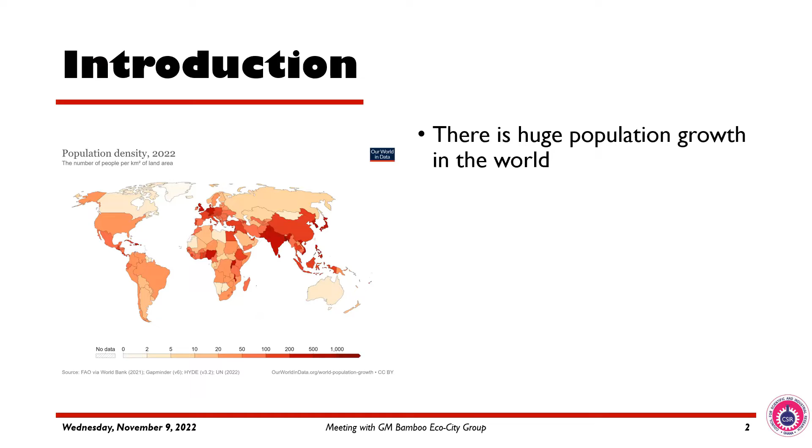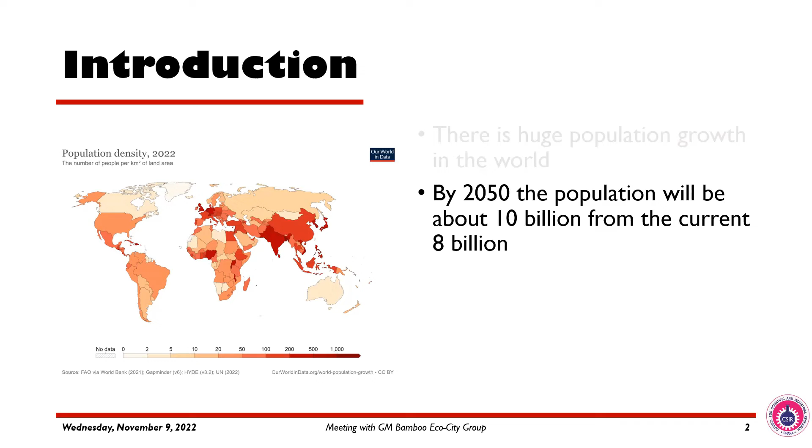So with the introduction, I'm showing the world map, and the reason is to relate it to population. There's a huge population growth around the world. Now we know that our population is about 8 billion. It has been predicted that by the year 2050, the world population will be about 10 billion, up from the current 8 billion.

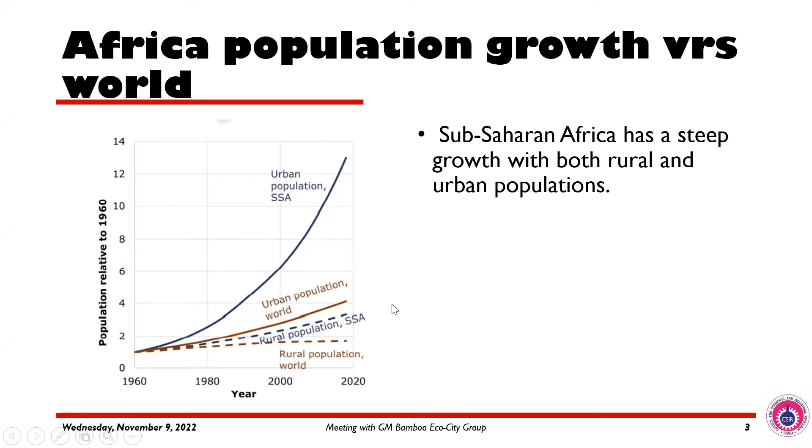The urban population in the world is also growing. But if you look at the rural population in the world, it is not growing, it is steady. However, the rural population in sub-Saharan Africa is also growing. So we can see a steep growth in both rural and urban population in sub-Saharan Africa.

Because of that, the demand for housing and other infrastructure in sub-Saharan Africa is very huge. It's not as huge in the developed countries because they've built almost everything already. In developed countries, when you go there, you don't see a lot of infrastructure development — their forefathers did very well to build everything for them. But in sub-Saharan Africa, our population explosion calls for a huge demand for housing and infrastructure.

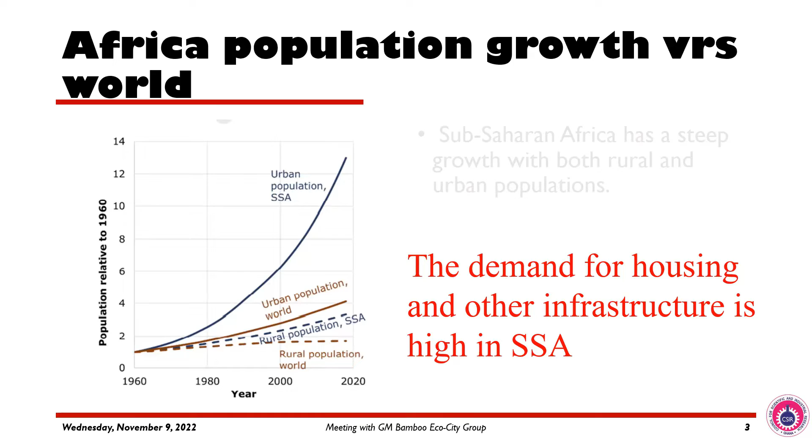So let's look at the Ghanaian scenario. We have about 16 regions, and I picked this data from the Ghana Statistical Service, between 2012 and 2022. In 2012, our population was about 26 million, and every Ghanaian knows that when they ended the census, our population in 2022 was about 33 million. So we know that by 2030, 2040, or 2050, we are going to have a high increase in our population growth.

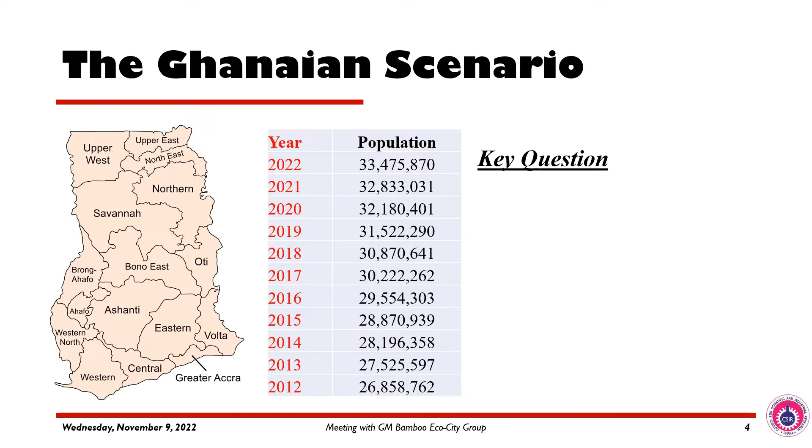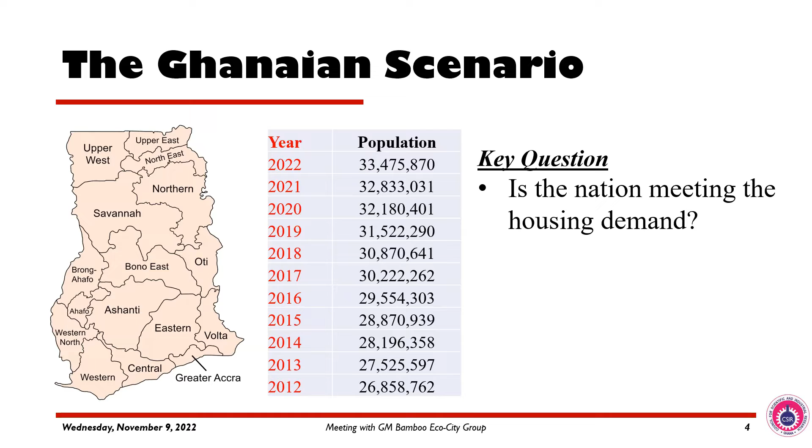So the problem can be viewed from different angles. As a cement scientist, now let me put myself in that perspective — how do I view the problem from my viewpoint? Let me give an emphasis before that.

We all know that in Ghana, almost every construction we do is in cement-based material. About 80 to 85% of our construction is from cement.

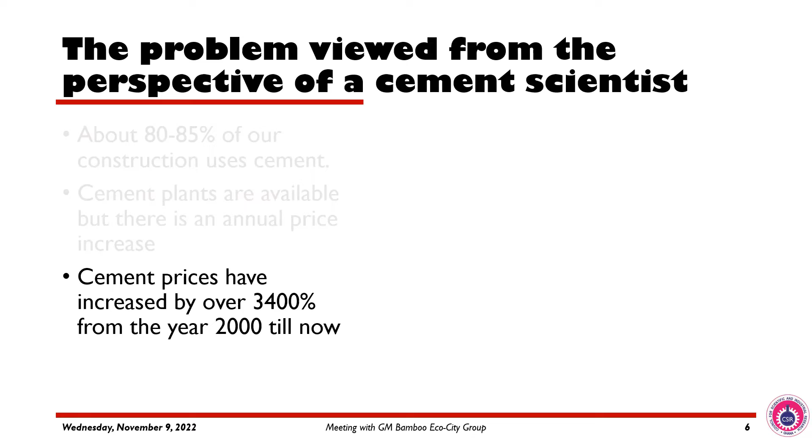Between the year 2000 till now, cement prices have increased by 3,400%. This is really huge. To back it up with data, I've been collecting my cement price data between 2000 and 2022, before I joined BRRI, every year I record it. So that has been the trend, and it keeps on increasing.

Because of this, it has really created problems with housing delivery. Cement-based materials are very expensive. For example, per meter cube of concrete, I remember two years ago it was about 400 Ghana cedis. Yesterday, I picked data from a concrete manufacturing plant, and for C30 concrete, you can buy it around 1,300 or 1,400. So you can imagine.

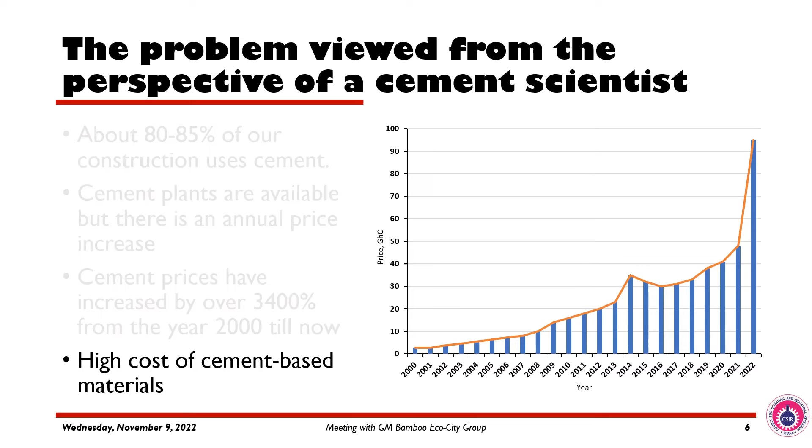The reason for these prices, I think if we care to know, is that we depend so much on imports. But I think as the presentation goes on, we will actually explore that.

So do we have feasible solutions? Yes. If we are having problems with cement price increases, then the best approach is to ask what we use to produce cement. It is clinker and gypsum. So why don't we produce it locally? That is a long-term solution. But the question is, is it possible for us to produce clinker and gypsum locally? We will answer that.

So let me say that we can't produce clinker and gypsum. Our limestone in Ghana is not of a high enough grade quality to produce the high quality clinker that you need. But of course, we have one plant in Ghana, by Diamond in Buipe, the Savasem, producing clinker. I met them recently in my office, and they shared with me the struggles they are going through to produce the clinker. I think next week I'll be at the cement plant for us to share some of these things and see the possible solutions we can provide.

So if we can't produce clinker, what about reducing the clinker factor in cement? Cement has been categorized into CEM I and CEM II. In Ghana, you don't have much CEM I, but CEM II is very common. CEM II uses about 85% clinker, then adds a bit of filler, which is limestone, and gypsum. Can we further reduce the clinker factor in cement to, let's say, 50% or 60%, so that at least we can cut down clinker importation in the country? Because that is the bane of our problem.

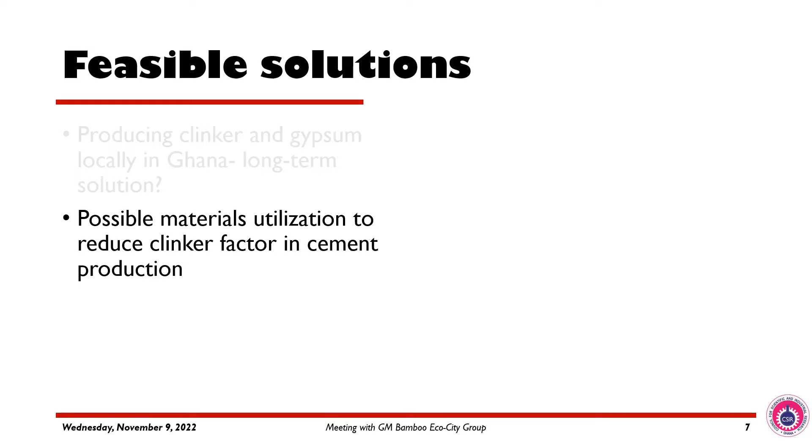So these are some of the possible materials we can use to reduce clinker. We have pozzolans in the form of calcined clays, fly ash, and silica fume. We also have fillers. I've mentioned CEM II, which is produced in Ghana using a bit of filler, containing about 85% clinker and about 15% filler—chalk, limestone, talc, oyster shells, clam shells. We can also use latent hydraulic materials, like slags, to produce that.

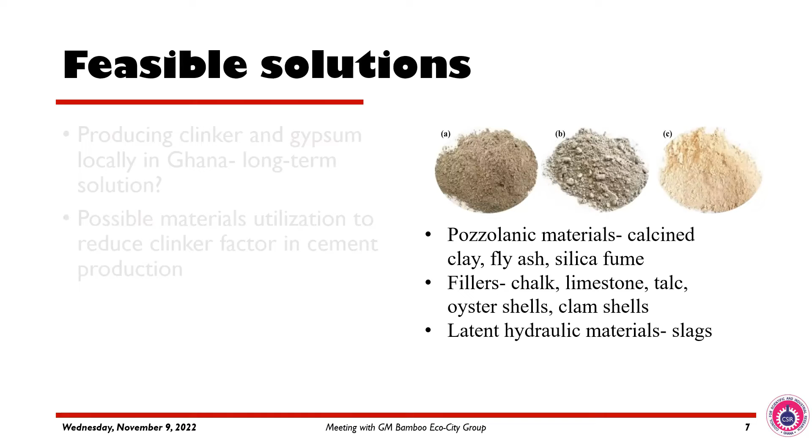So what we can also do is use a mix of non-cementitious materials and cementing materials for construction. If we can use a mixture of non-cementing and cementing materials for construction, then it means we can actually do something about the cost.

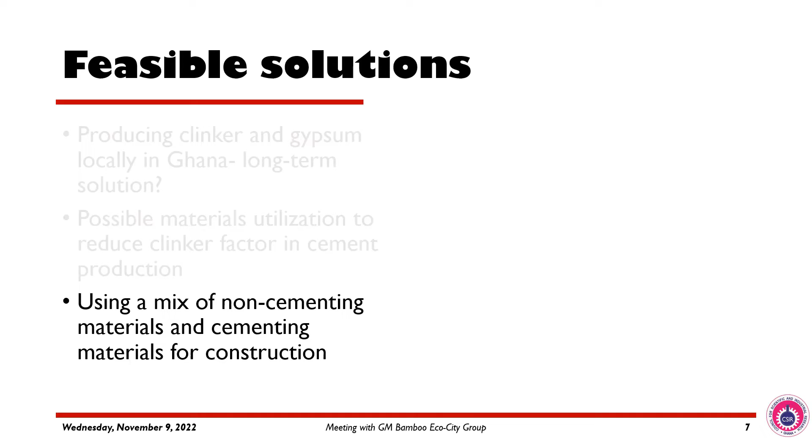Now, I picked this work. This is a Ghanaian lady working on rammed earth construction. She used about 5% cement with laterite earth, rammed it with ramming machines, and used it to produce houses. I think it's a very innovative way to build our houses. What I'm saying is we can get a mix of cementing materials—for example, columns, pillars, and beams made of concrete—and non-cementing materials like rammed earth, which uses very little cement, to reduce the cement cost.

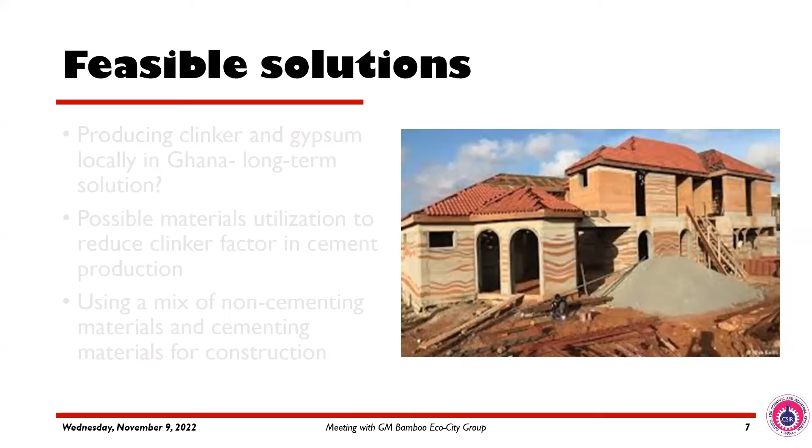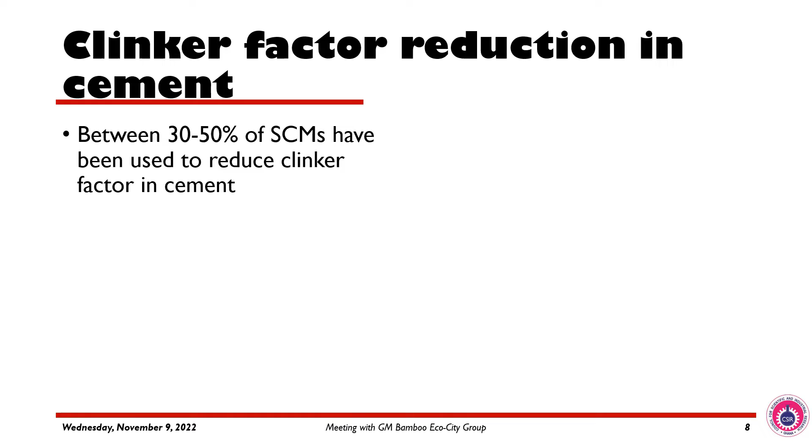So we want to look at clinker factor reduction in cement. Practically, we are using between 30 and 50% of supplementary cementitious materials to reduce clinker factor. That has been what has been done in the world, and we have advanced that.

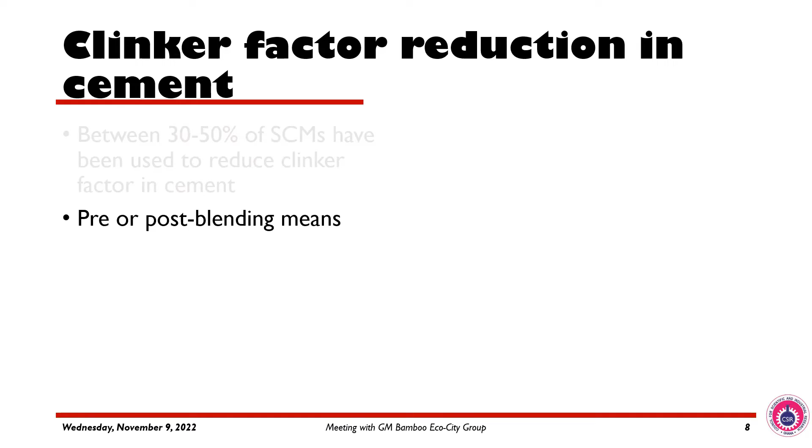When we do that, we are either pre-blending or post-blending the materials. You can pick a material and use it at a cement producing company, they have silos for the supplementary cementitious materials and blend them together. You can also do post-blending, which is when you are making your mortar or concrete on site, and you come along with, say, a clay pozzolana, blend it on site and use it for construction.

All these things have shown that, yes, we can improve the strength properties, which involve compression, flexural, modulus of elasticity, dynamic modulus, and what have you. And we also improve the durability of the material, in the sense of transport properties like resistance to aggressive ions and carbonation. All these things are improved when we use these materials to reduce clinker factor.

I did this work last year, where I replaced cement with between 10 and 50% of calcined clays, and cured it from 3 days to 90 days to look at the performance. What I did was to look at the common concrete grades we use in Ghana. When you go to many sites, it's between C25 and C30, so I used C30 to design my concrete.

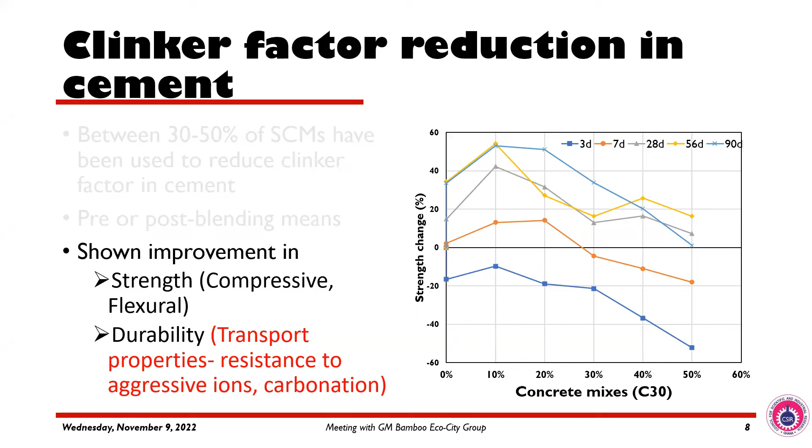I did a little bit of durability tests. One of the common durability tests is to look at chloride ingress. Mostly durability has got to do with the pores within the material. If you can look at how the pores are arranged and how easily some ions can flow through the material, then you can understand the durability. So I used the rapid chloride permeability test.

I prepared this concrete, and of course, you realize that almost all the materials containing clay pozzolana had a lower ingress of chloride compared to the control. But the point is that we want to reduce costs, so we are interested in higher volumes of replacement. 10, 20 is okay, but let me look at 30, 40, and 50, because the higher I replace, the more savings I make. And 30, 40, 50 were similar. It gave me an idea to look at all these replacement levels. But it doesn't end there, we have to do so much work on it to actually convince ourselves these are very viable replacements we can do.

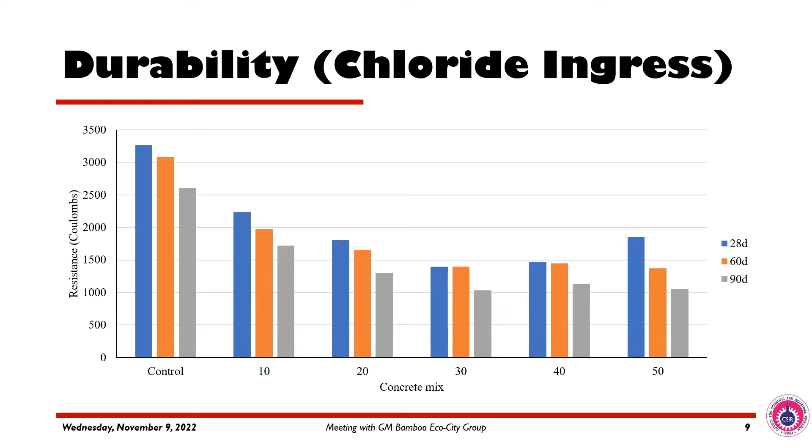Let's look at economic benefits. Contractors are always interested in these things. Because I did some work on concrete, I prepared some economic benefits, specifically more of a financial economic benefit. In a concrete per meter cube, this is the composition per kilogram - with the cement I'm using 406, 208, and then the rest are the various compositions. We looked at the costs per meter cube and the cost of producing a C30 concrete, and I got 896 Ghana cedis.

I did 30% clinker reduction, or cement reduction, replacing it with clay pozzolana, and reduced the cost by 5%, so I had 853. At 40%, I reduced the cost by 7%. At 50%, I reduced the cost by 10%. That is very important - one of the most important things I want you to note is this one.

So just note the cement cost reduction. With the control, the cement was 771 Ghana cedis. When I reduced it by 30%, I was getting 547. So in a nutshell, what I want to drive home is that you are reducing cement costs by reducing clinker factor or replacing it with appropriate cementitious material, and you are getting a reduction between 29% and 49%. So that is a key thing I want to drum home. Two things you can see from this table: you are reducing the overall cost of concrete, and you are also reducing the overall cost of cement.

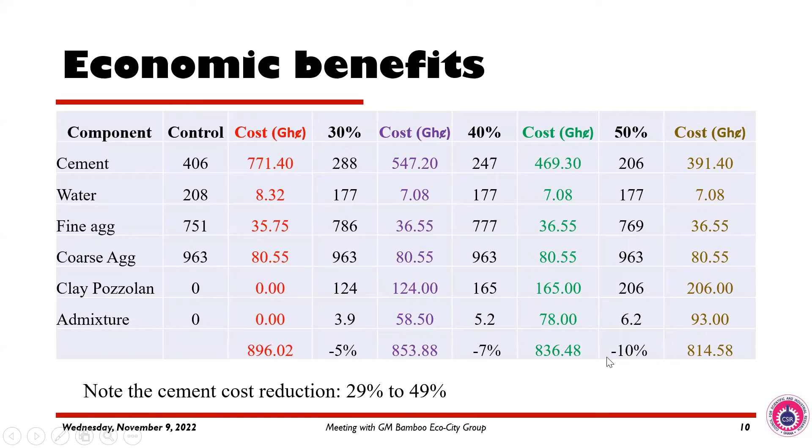Sometimes I always work with chemical admixtures in the form of superplasticizing agents. They are high range water reducers. In Ghana, people don't use that much, but I always encourage people. In my lab, I do a lot of concrete mix designs for clients. So when they come, I always do the design using chemical admixtures. Some people don't like going with the admixture, they say okay let me do it without. But it's always safe for you to use chemical admixture because you are able to control the water to cement ratio, the water content in your concrete mix. It is very safe. So you can imagine that if I'm not using chemical admixtures, you can save more than the 5% and the 10% that I'm talking about. So this is the economic benefit of using this kind of materials.

So what are some of the advances that we've made around the world? It is not only a Ghanaian issue, it's around the world.

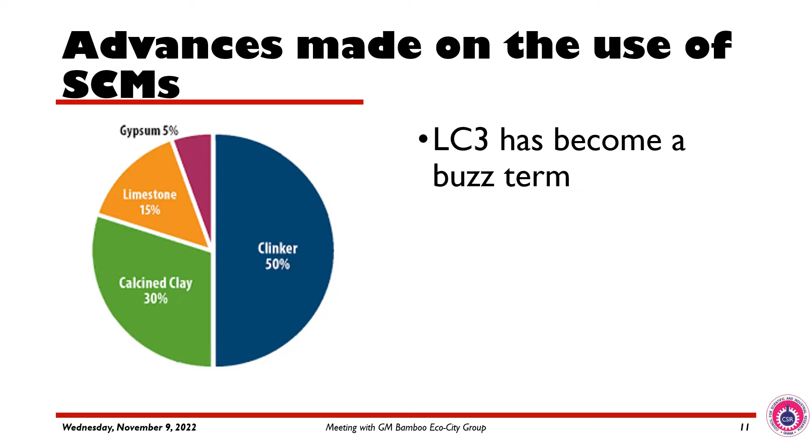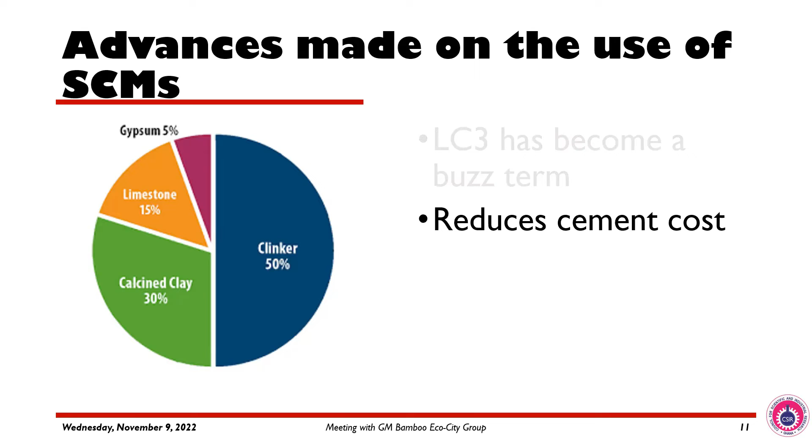Okay, so now we're talking about LC3 cement. What is LC3? LC3 is basically reducing clinker factor to 50% and adding calcined clays and limestone together with 5% gypsum. So why is it so important? It's a buzz term in the world. As I initially mentioned, there's a professor at EPFL, Professor Karen Scrivener, who has been working so much on LC3 cement and pushing it. Now she chairs the Energy Committee, she's part of the Energy Committee on the IPCC. And as I'm talking now, she's also at COP, the COP meeting in Egypt. So we found that when you reduce clinker factor by 50% and replace it with these cheap materials like clay, pozzolana, and limestone, you invariably reduce the cement costs. And then you also reduce the carbon footprint of concrete. In the next slides, I'm going to share with you the carbon footprint of concrete.

So let's look at how the carbon footprint performs, and that is an environmental issue. Every plant that produces cement generates approximately 1 ton of carbon dioxide. The point is that most sub-Saharan African countries are net consumers of cement. We don't have so much of plants that are producing cement like the developed countries, like China, India, and some parts of the Asian countries. They produce so much cement. So in sub-Saharan Africa, we don't have that. We also don't have other companies that generate so much carbon dioxide. So we are net consumers of cement.

This graph is showing the consumption or the generation of carbon dioxide. Now, by the IPCC, the threshold is 2.7 kilotons. But when you look at this graph, you see that sub-Saharan Africa is way down. We don't generate so much carbon dioxide in the atmosphere. So who cares? If you're not generating so much carbon dioxide, why do we have to bother ourselves with what the Europeans and the Americans are saying, that everybody should think about carbon dioxide emissions and let's make the world safe? After all, when they are having energy problems, they try to go back to the use of coal. But that's not the issue. The issue is that both the producers and the consumers contribute to carbon footprint.

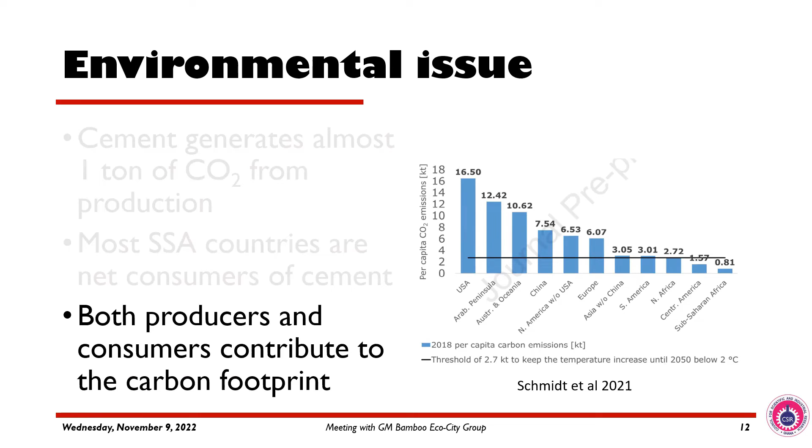In my next slide, let me walk you through carbon footprint in the world. So what is happening is that I think we generate about 60 billion tons of carbon dioxide in the world. The cement plants are contributing between 8 to 10% of this carbon footprint. Now, the point is that as the carbon dioxide comes into the atmosphere, it actually prevents the heat generated by the sun from escaping the atmosphere. So when it's not escaping, it means that the heat is remaining in the atmosphere, and some say it cooks the earth. So whilst it cooks the earth, we suffer. Now, the world has seen that if we don't take care, and now we are around 410 parts per million, and if we don't take care and we go to about 550 parts per million, it is going to generate a serious catastrophe for the world.

You and me, we can't survive on this earth. So we are doing our very possible best to reduce our carbon footprint so that we don't trigger it. That is why it is important for every country to do its possible best to minimize carbon dioxide footprint.

Well, the effect of these things is the cause of rising sea level. So now, as the earth is cooking up, the glaciers in the Arctics and the Russians, the cold parts of the world, are melting up. And as it melts, it increases the volume in the sea, and that triggers flooding and many things happening around the globe.

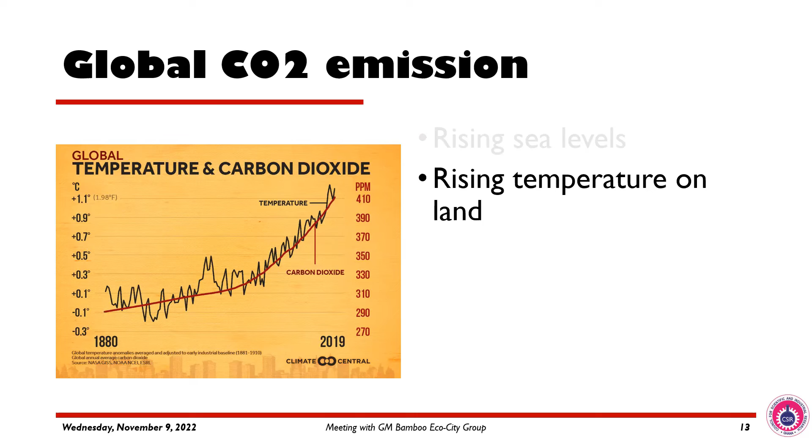It is also cooking the earth, cooking the land, rising the temperature on earth, and we are experiencing global warming. You go to other countries and see that the weather pattern has changed, and everybody listening here will accept that, yes, the world is becoming warmer and warmer.

And we are also having increasing temperature on the sea. So the earth is warming up, the sea is warming up. Now, if you look at the science behind the increasing temperature of the sea, that is what generates all the hurricanes happening in some parts of the world. It brings currents, and then we hear of tsunamis, we hear of Hurricane Katrina, Hurricane Charles, whatever they want to name them.

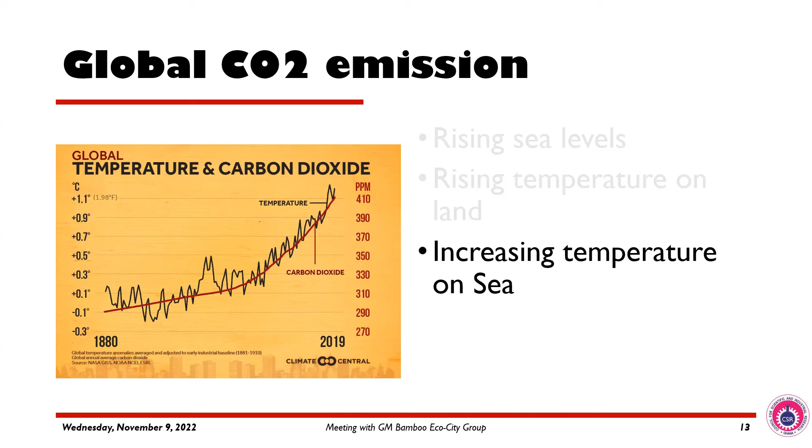So that is it. Global warming is not an interesting thing for the world. The science has proven it, and there's so much data to back that yes, global warming is occurring, and we need to minimize carbon dioxide generation in every country.

Well, so if we have to minimize it, what is the cement plants doing? What is the concrete industry doing? As I've already mentioned, the cement and concrete industry is contributing between 8 to 10% of global carbon dioxide emission. This is work that was done by the American concrete industry some years back. They looked at replacing cement with supplementary materials.

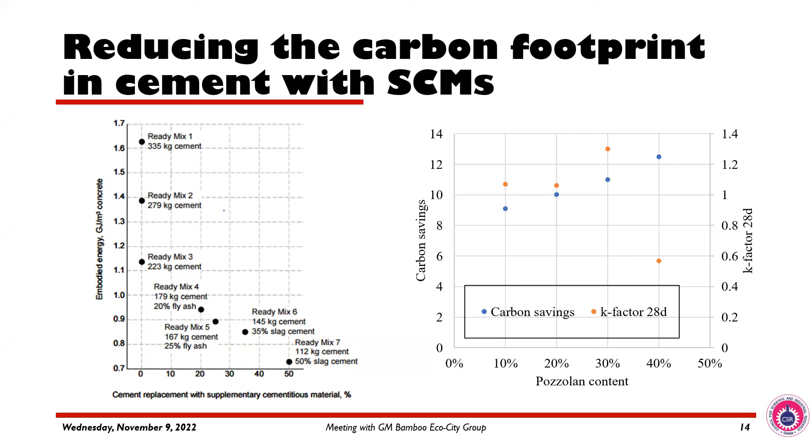So after doing this efficiency factor, I also did some work on carbon emission and environmental impact. This is also very key. We have environmental impact and total carbon emission. In this area of cement science and concrete, you have to be mindful of these two things. Environmental impact is a ratio between the total carbon of the material you are generating against the strength you are achieving at the required time, and in the standard, the required time is 28 days.

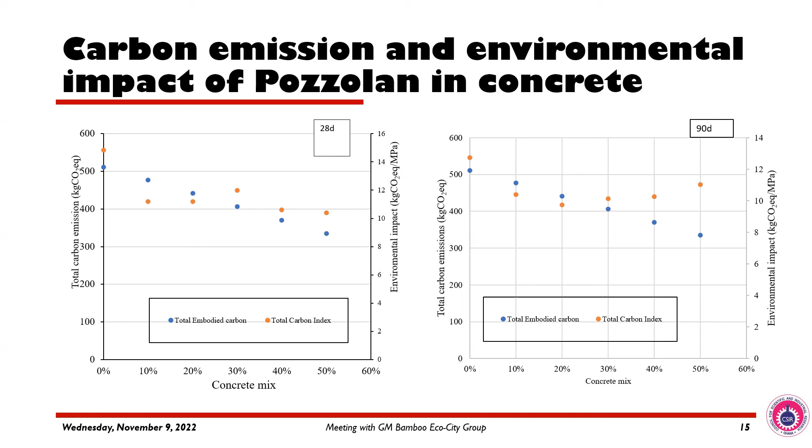I always show practical examples of work that has been done. Recently I'm championing a project at Cape Coast University, building the Department of Marine Science. Whoever knows Cape Coast may know that they have the sea there, and almost every place when you dig deep you will get water coming out, and the water is much like sea water. That's one of the good things about pozzolana cement concrete — I've shown you it has lower ingress to chloride. So we did a mix design for them using the pozzolana.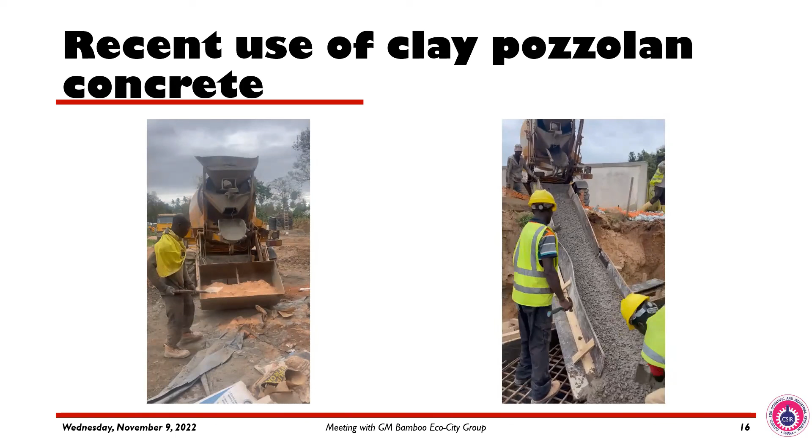This is also the concrete plant, the van pouring the concrete. This is a foundation work, and I'm telling you, this is a calcined clay pozzolana concrete. It used 30% of calcined clay or clay pozzolana. Now we also did this.

No, the first one was a mobile van, and this one was a concrete mixer. People may ask why you were using a mobile van instead of a normal concrete mixer. So this is a concrete mix.

We proportion the mix for them on site using the various components, and then they do it well. The problem sometimes we have on site is that people have issues with proportioning. That is why we at BRRI are there. I have trained a lot of people - you contact me, this is a super plasticizer, you contact me and we can do it for you. They come to site and monitor your work for you, and then you can make savings on costs and the environmental impact.

So with this concrete, I call it a low carbon concrete. And I'm going to document this and share it in some conferences that I may attend in the future.

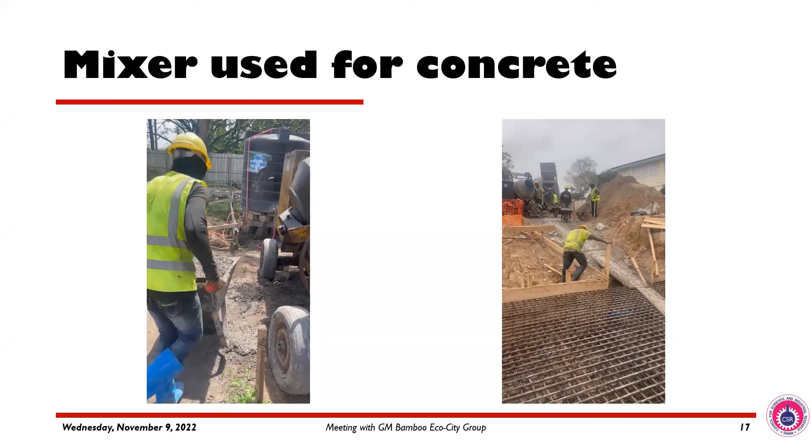The guys were happy, they were just driving the thing and pouring it on the raft foundation. Yes, and that is a low carbon concrete.

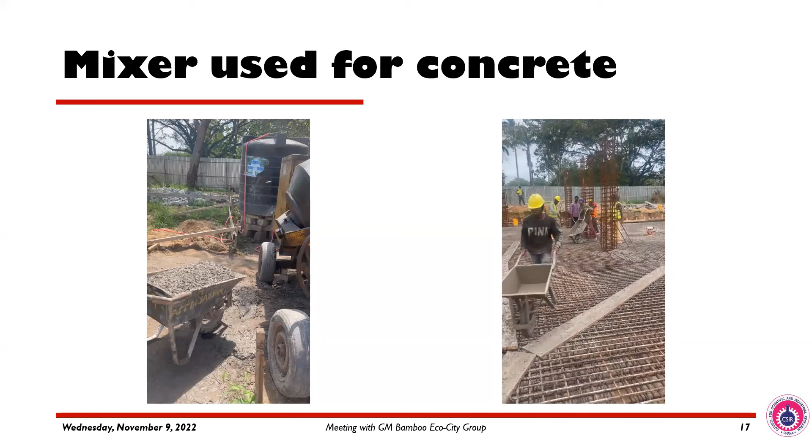I'm also happy for this work because it's one of the main works that I've done this year, and at least the contractor was so happy. It's a World Bank project, and the World Bank people were very happy over the project.

Well, I've talked at length, 18 to 20 pages. Don't worry, I'm going to conclude.

So in conclusion, the use of clay pozzolana has technical benefits. It improves the strength and transport behavior of cement-based products. You have seen this from the plenty of talks that I have made.

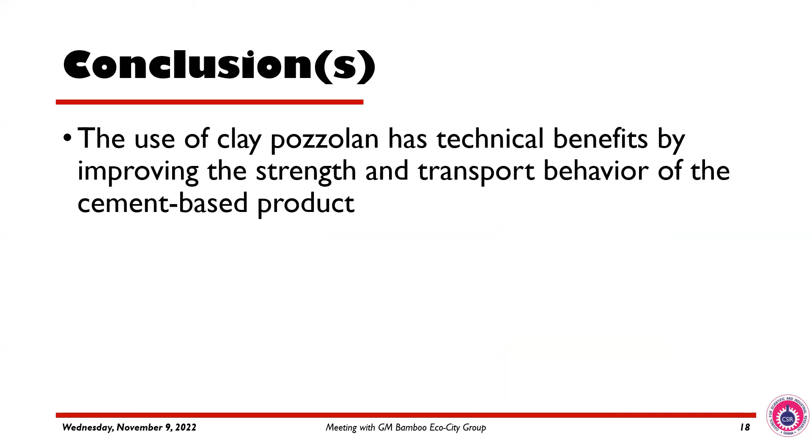Now, it also enhances the longevity of structures, meaning the service life of the structure is enhanced. Why is the service life enhanced? We all know that carbonation and chloride ingress affect the service life. It creates corrosion of the rebars, which can lead to extreme cracks and expansion. So once there is higher resistance to it, you will enhance the service life.

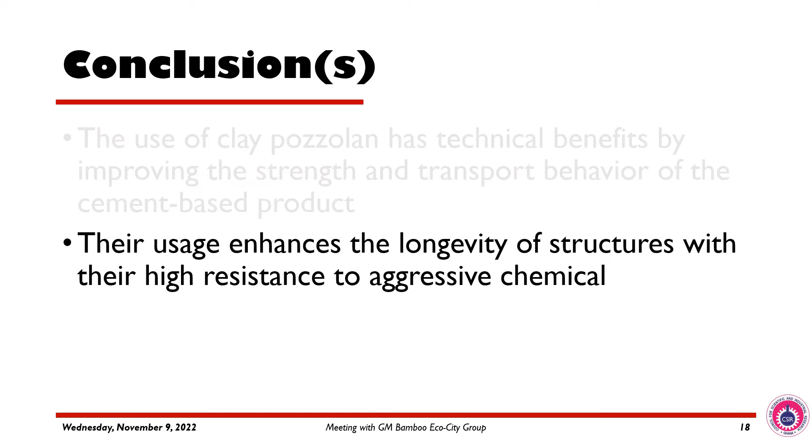It's so interesting, we calculate service life for people. There's a project I did on the Owabi and Barekese Dam recently, and they were interested in the calculation of the service life of the dam. So you need all this data to look at the service life of the dam. And if you have an idea of how resistant your structure is, you can actually calculate the service life.

So now from all the deliberations and the data and everything that I've shown, you can see that clay pozzolana can impact positively on the carbon footprint in the cement and concrete industry.

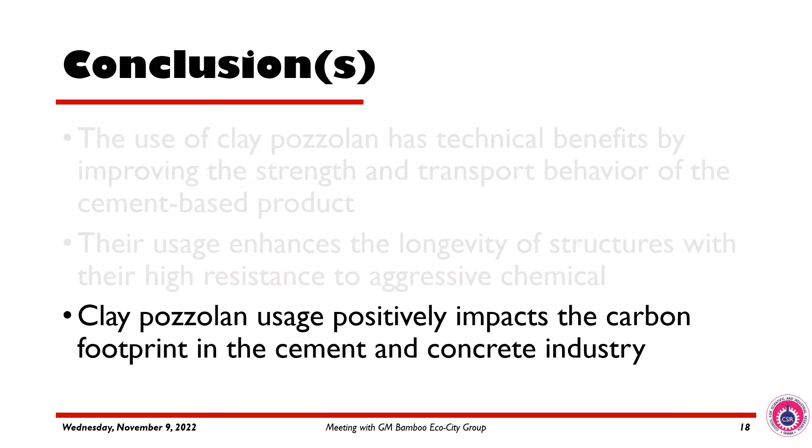Now, let me give some recommendations. It is funny, my recommendation is very funny. They say charity begins from home. Why am I saying that? Sometimes, I know I started this pozzolana thing a long time ago.

You can give fancy presentations at conferences and people will come to you saying 'you've done a very nice presentation, oh come on.' But it ends there and everybody moves away. You go to meetings like this one that we've organized, and people are just interested in making a name of how well the program went. But the practicality of it is always missing.

Now, I would like to recommend that if people here are contractors or consultants, please start using this product. For me to be a disciple of the product, every project I do, I use clay pozzolana - to the extent that I recently did work for my mother using 50% clay pozzolana and 50% cement for the plastering. Everything I do, I use clay pozzolana.

So if we have 20 members here and everybody says, okay, from today every project I will recommend clay pozzolana, I think we will make headway on the carbon footprint and the use of local content. This is my second recommendation.

Of course, we need policy initiative from government. So if a government rep is here, like the assemblies - I know some people in the assemblies talk big, they always want to be seen on programs, but when you go to them, they don't even use it. So then why do you talk about these things? We have to be using it in our assemblies, and we have to initiate it when we go to the local government ministries, saying yes, this product is available.